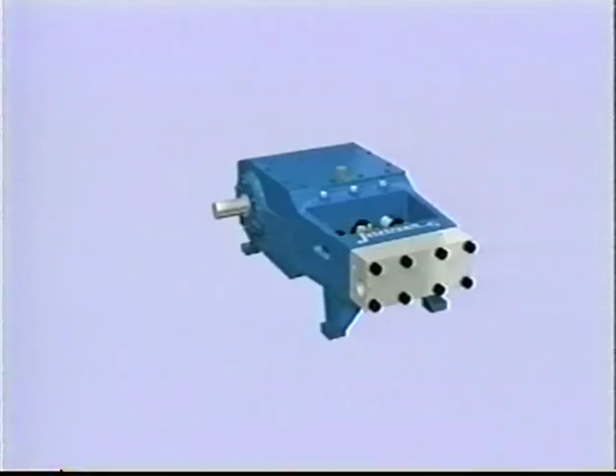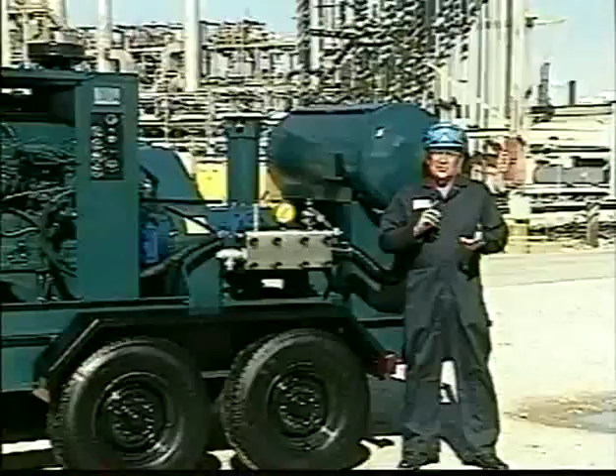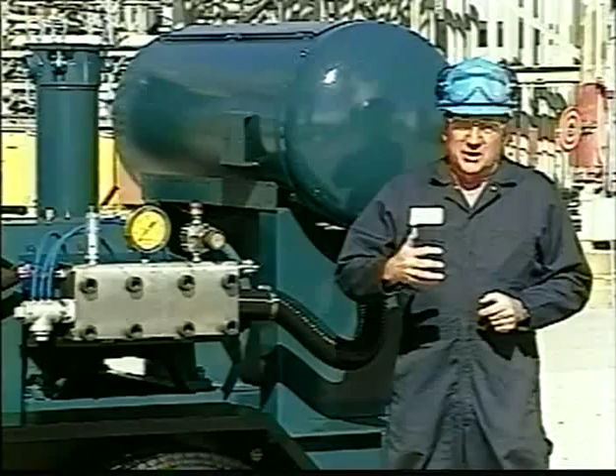There have been notable advancements in industrial water blast systems since water blasting became an important cleaning tool some 30 years ago. Some of these advancements resulted in more efficient water blast accessories to accomplish more cleaning work in shorter times, while other advancements have resulted in more reliable and easier to maintain water blast equipment.

The pump, however, which is the heart and the most important component of a water blast system, has been lagging behind in major advancements. Most water blast pumps sold and operated today utilize 20-year-old pump technology.

I want to show you a new generation pump, JetStream's UNX, whose advanced design will lower your water blast system's operating cost and increase your system's operating range and effectiveness.

To appreciate the benefits of UNX, we'll first look at the inner workings of a common water blast pump, and then examine the problems with these older generation water blast pumps that are still on the market today.

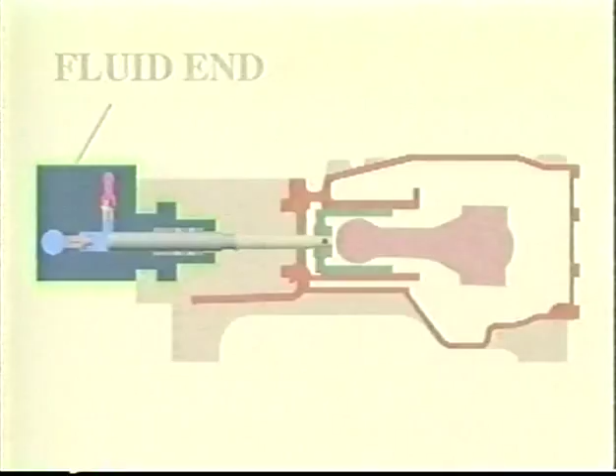A water blast pump consists of a power end and a fluid end. The power end of the pump converts rotary motion into back and forth motion to drive the fluid end. The fluid end produces the high-pressure water.

As the fluid end's plunger moves back, its suction valve opens and water is pulled into the plunger chamber at low pressure. As the plunger moves forward, the suction valve closes and the discharge valve opens. The packing bears down to form a seal against the forward-moving plunger as high-pressure water is forced out of the chamber. The fluid end is subjected to severe operating conditions as the high-pressure water is being produced.

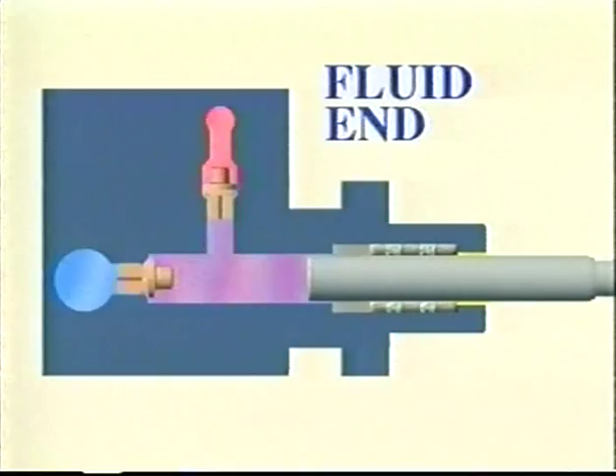High-pressure pulses are created on every plunger stroke. These pulses spike, causing the valves to hammer on their seats and the packing to bear on its moving plunger at pressures actually higher than the pump's pressure gauge reading.

Depending on the pump's speed, these severe conditions occur up to 8 times per second from each plunger. The fluid end's plunger packing must also endure literally miles of plunger travel through it.

Because of these severe conditions, the fluid end is where most of the pump problems occur.

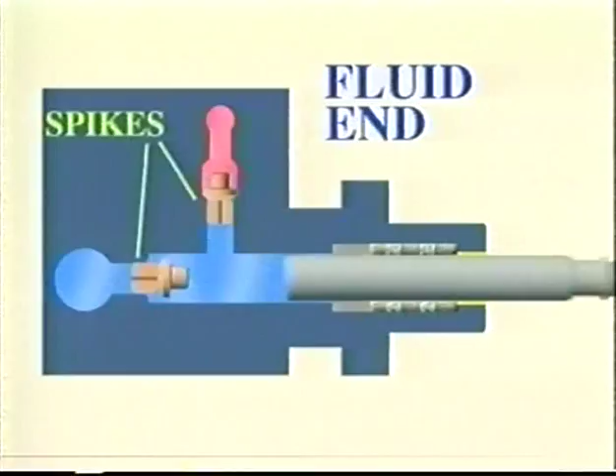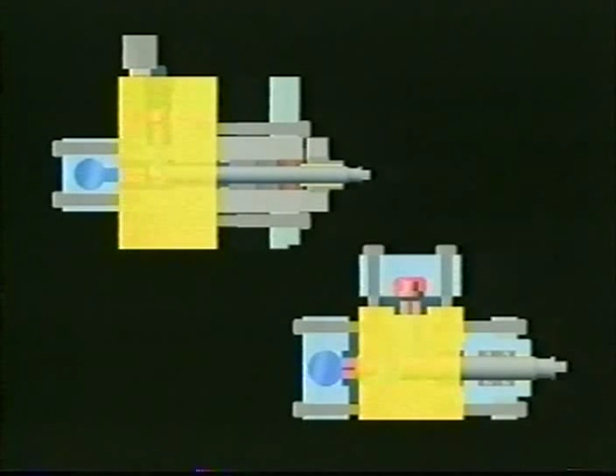Let's take a closer look at some problem areas of these common pumps on the market that still use 20-year-old pump design technology. Both of these fluid ends have a large central block or fluid cylinder that is highly prone to fatigue failure damage caused by the same pressure spikes we saw earlier.

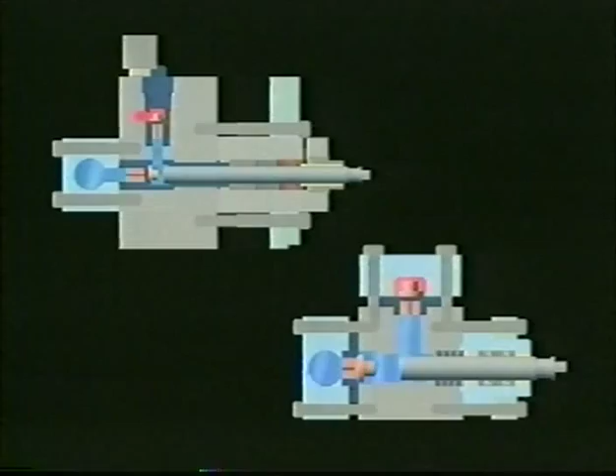Both have separate suction and discharge valves that are positioned either within or on the outside of the fluid cylinder. Leakage around these valves can cause severe erosion damage to the fluid cylinder.

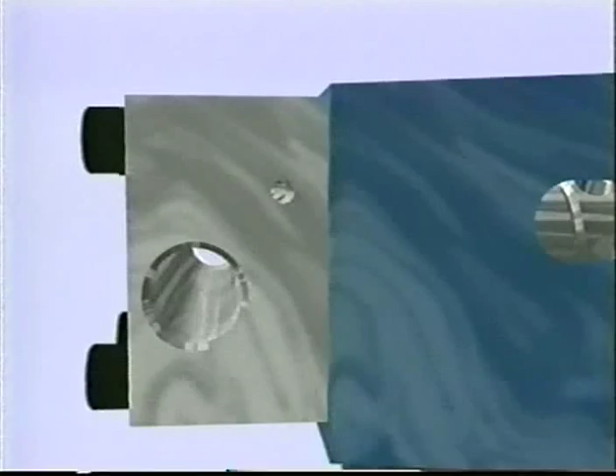Now let's take a look at the UNX water blast pump. At first glance, you'll notice the simplistic design of the UNX. Looking inside the fluid end, you can really appreciate its simplicity. Developing this simple design was the first step JetStream took to provide a more rugged and trouble-free water blast pump.

UNX is the only pump on the market that does not have a fluid cylinder. You see, fluid cylinders, like those found on other pumps, crack and have fatigue failures due to the damaging pressure pulses that we saw earlier.

Instead of a fluid cylinder, the UNX uses a simple manifold to conduct low-pressure suction and high-pressure discharge water to and from its valves. This manifold cannot fail like a fluid cylinder because it's not exposed to the plunger's pressure pulses. With the UNX, the high cost and inconvenience of replacing the fluid cylinder does not exist.

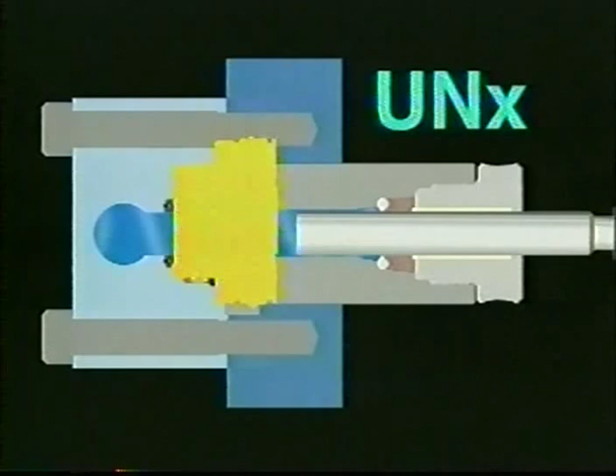Still, another dependability feature is the UNX's inline valves. They allow the fluid end to work smoother and with lower pressure pulses. The result is increased valve life, increased packing life, and increased pump reliability.

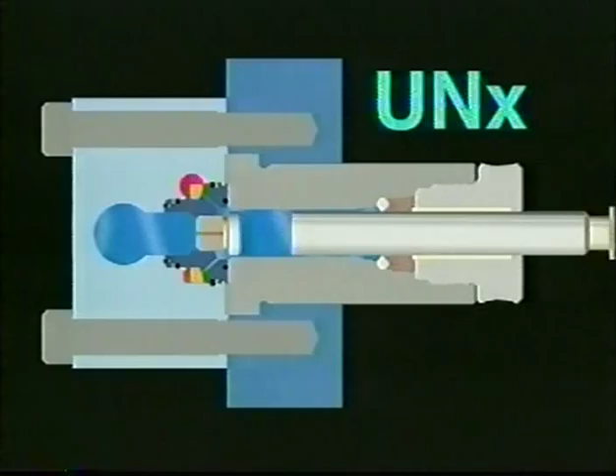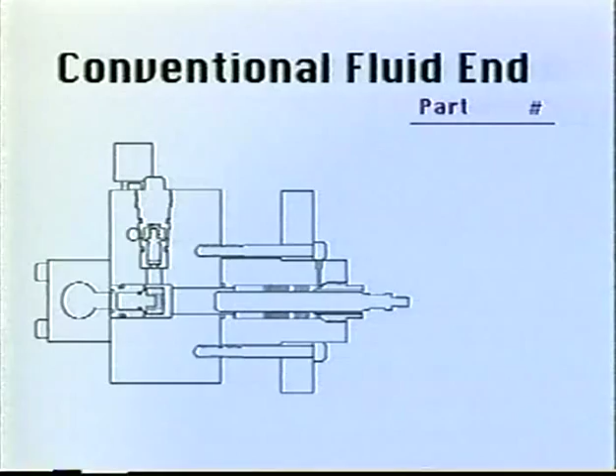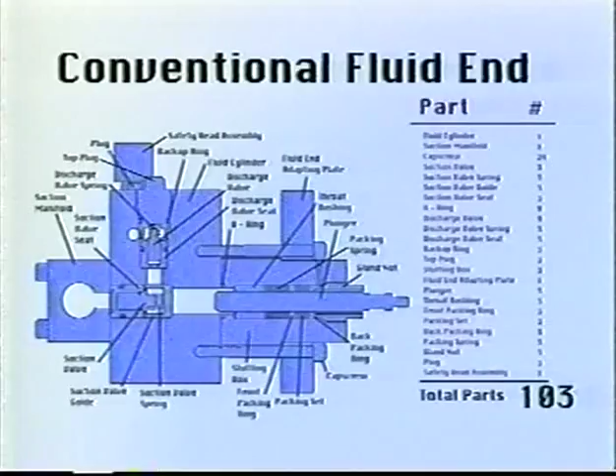The UNX, on the other hand, contains only 37 total parts. The UNX has a number of operator-friendly safeguard features that will save operating time and money.

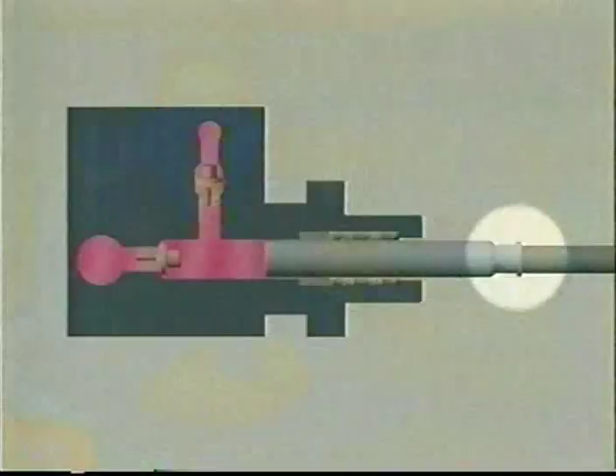For example, where other pumps use threaded-style plungers that can unscrew during operation and crash into the suction valve, the UNX uses clamp-style plungers to prevent this from ever happening. Clamp-style plungers maintain a safe connection to the pony rod at all times.

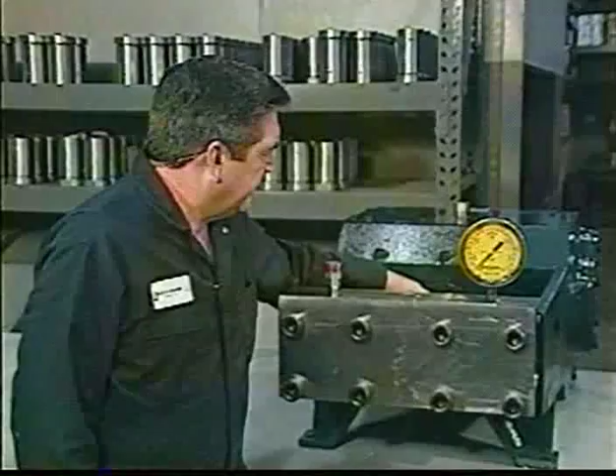Another operator-friendly safeguard feature is that the UNX fluid end uses its discharge pressure to automatically clamp itself together. This reduces the number of cap screws required to hold the fluid end together, from the usual 24 or 36 cap screws to only 8 cap screws on the UNX. Fewer cap screws also means less cap screw tightening hassles or leakage problems for the operator. These are just a few of the features that help make the UNX truly an operator's favorite.

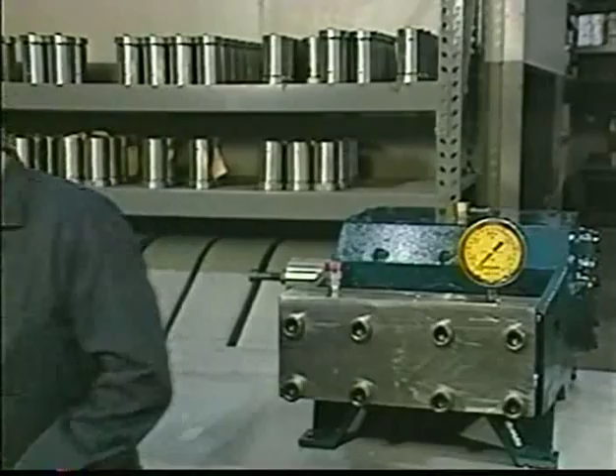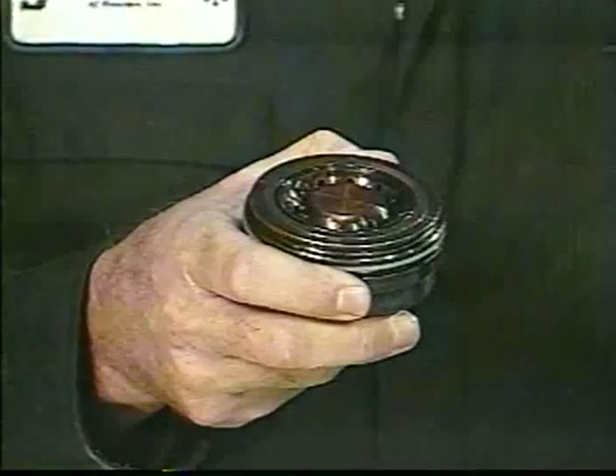The UNX is the easiest pump to maintain on the market. Slip-fit components, coupled with cartridge-style repair parts, make the UNX simple and easy to maintain. For example, the UNX's suction and discharge valves, valve seats, springs, and all of the valve seals are uniquely combined into a single cartridge called a univalve.

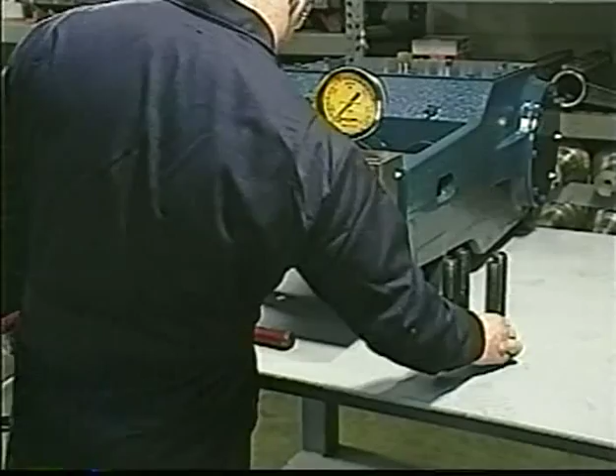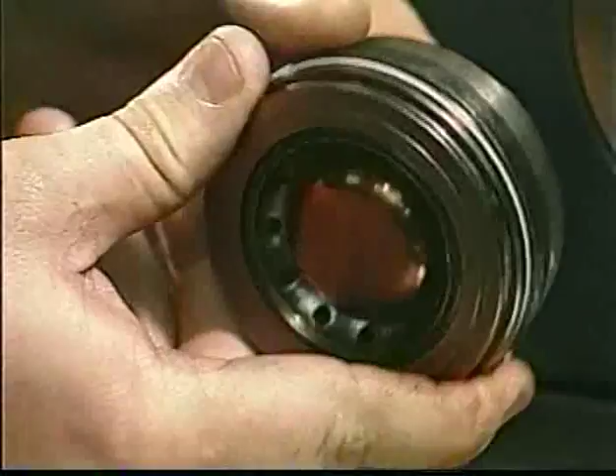Access to the univalve cartridges is easy. First, remove the manifold cap screws. The manifold will now swing down about its bottom hinge. The univalves can now be popped out of their pockets using 2 standard screwdrivers. With this easy access system, the univalves can be inspected, repaired, or replaced in minutes.

Removing the valves on other pumps isn't as easy as a UNX. Let's take a look at 2 popular styles of pumps and compare them to the simplicity of the UNX.

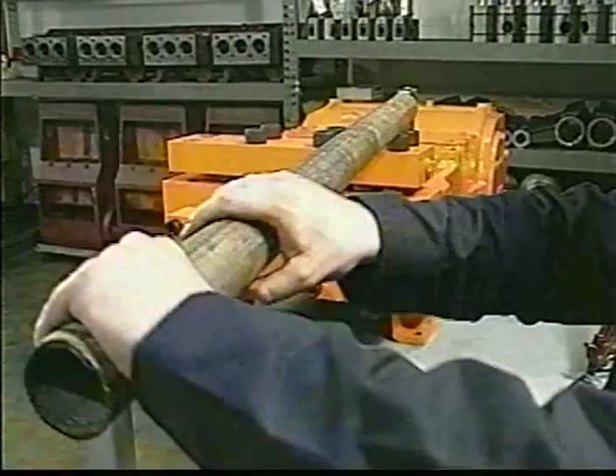This pump incorporates a large central block or fluid cylinder and 2 separate manifolds, one suction manifold and one discharge manifold. To remove the valves on this pump, you first have to remove 8 cap screws from the discharge manifold. This may prove a bit difficult, as this style pump requires discharge cap screw torques of at least 600 foot-pounds.

Remember, the UNX uses its discharge pressure to help clamp the manifold to the power end. Its discharge pressure actually works for it, not against it. This means you'll never have to worry about excessive cap screw torquing.

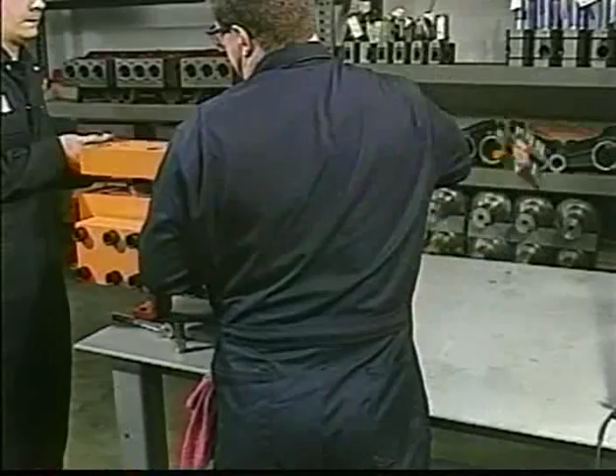After the 8 cap screws are removed, it's time to remove the discharge manifold. This will require a lifting device or the help of a second man to lift the discharge manifold off of the fluid cylinder. With all that said and done, it's finally time to remove the discharge valves. Unfortunately, you're only halfway through the operation.

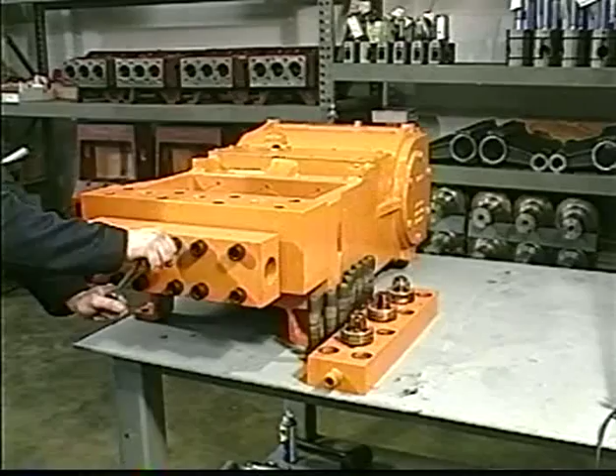We've successfully removed the discharge valves. It's now time to remove the suction valves. This procedure is essentially the same as removing the discharge valves. Remove the 12 suction manifold cap screws. Remove the suction manifold.

Be sure you're wearing protective footwear, such as steel-toed boots, as the suction valves will sometimes fall when you pull the suction manifold away from the fluid cylinder. Now you're finally done. Getting to the valves, that is. Remember, once you've replaced the valves, this all has to go back on.

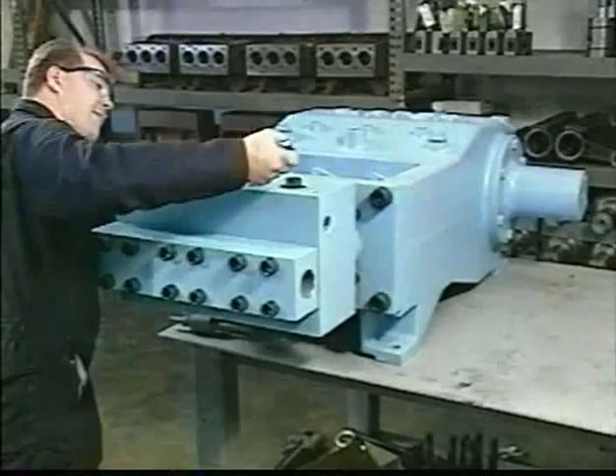This style pump incorporates a suction manifold and a massive fluid cylinder. To remove the valves on this pump, first remove the 3 top plugs. This will allow you access to the discharge valves.

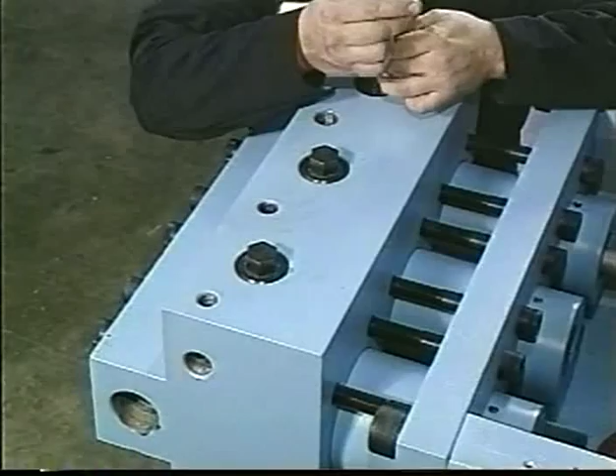Use a set of long pliers to reach in and remove the valve spring, and then the valve. To remove the valve seat, you have to use a specialized or proprietary removal tool. Screw this tool into the valve seat and use a hammering action until it finally breaks loose. This procedure has to be repeated for each of the remaining 2 discharge valve assemblies.

To remove the suction valves, you have to first remove the 12 cap screws that hold the suction manifold on the fluid cylinder. Then remove the suction manifold.

Once removed, the special valve seat removal tool should be used to hammer the seat until it breaks loose. Remove the valve and then the spring. Follow this by using long pliers to remove the valve guide.

To a specialized mechanic, these common maintenance operations may not seem like much work, but when pitted against the maintenance simplicity of the UNX, they pale in comparison. Remember, to remove the valves on the UNX, all you have to do is remove 8 cap screws, swing the manifold down on its hinge, and pop the cartridges out with a standard pair of screwdrivers. One of the biggest pluses to the UNX's simplistic design is the fact that periodic maintenance checks are a reality without the cost of downtime or specialized manpower.

The UNX valves can be checked in the field by one operator with no special tools in a matter of minutes. All other pump designs are so time-consuming and difficult that periodic maintenance checks are not practical. They require special mechanics, too many specialized tools, too much time to work on, and usually require the use of a crane-equipped shop. It's so inconvenient, in fact, that most owners of these pumps never check the valves until something goes wrong on the job.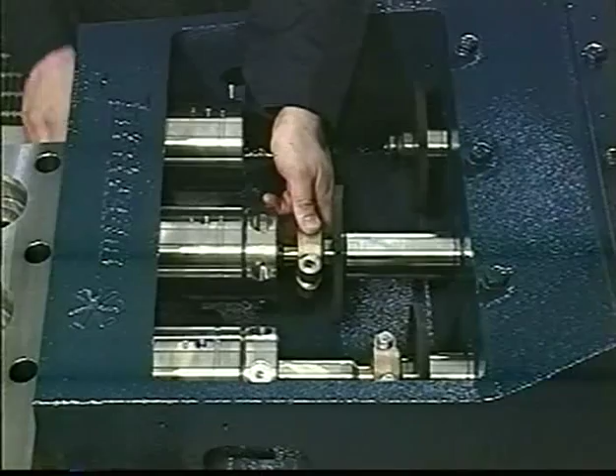Let's take a look. First, remove the plunger clamp. Then all you have to do is unscrew the packing gland. That's it. The packing set, plunger, and gland nut all lift out in one convenient assembly. The UNX's plunger packing set is called Unipack. Unlike other replacement packing sets that contain only the packing rings, JetStream's Unipack set contains all the parts, including the plunger brass, to make the entire packing section of the stuffing box up to new condition.

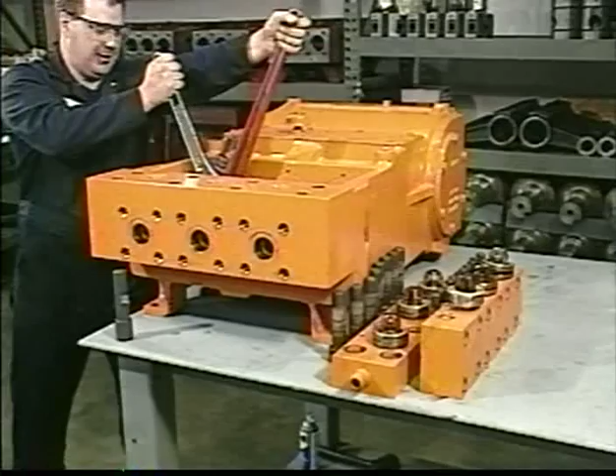Let's compare the simplicity of the UNX first with this style pump. Using 2 wrenches and a considerable amount of torque, unscrew the plunger from the crosshead stub. Now, push the plunger into the stuffing box. Remove the 4 stuffing box flange bolts. This may prove a bit tricky, as the bolt's location and confined area makes them hard to get to. Now, pry on the stuffing box until it breaks loose from the fluid cylinder. Once this is complete, you can remove the stuffing box and plunger assembly from the fluid cylinder.

Remove the packing spring from the plunger and push the plunger out of the stuffing box. Now you have to use a special tool to literally hammer the packing out of the stuffing box. You've now gained access to the packing, at least to one set of packing. You must repeat this entire procedure 2 more times to gain access to all 3 packing sets.

The packing changeout procedure is similar in this style of pump. You must first start out as though you're going to replace the valves. Remove the 12 cap screws that hold the suction manifold on, and remove the suction manifold from the face of the fluid cylinder. We've already been through that procedure, so we'll pick up where we left off with the valve change.

At this point, to remove the first set of packing, you have to loosen the gland nut. Then remove the plunger. The plunger on this style pump has to come through the front of the fluid cylinder. Once this is complete, use a rod to push the throat bushing, packing springs, packing set, and rear packing ring from the front to the rear of the fluid end. You now have access to one set of packing. Repeat the entire procedure 2 more times to gain access to all 3 packing sets.

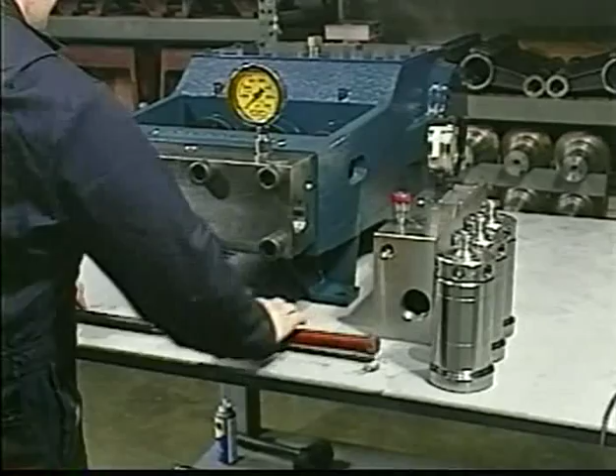JetStream engineers not only designed a fluid end that is simple to use and maintain, but it's also versatile. The UNX can be converted from an 8,000, 10,000, or 15,000 PSI pump to a 20,000 or higher PSI pump in minutes. For a higher pressure UNX, simply disconnect the plunger clamps, change out the stuffing box assemblies, and replace the lower pressure manifold with the higher pressure manifold. That's it. The higher pressure manifold is designed with special internal flow passages for optimal higher pressure performance.

And it uses integral special connections for safer higher pressure operation. Slip-fit modular design and parts light enough to be handled without a crane or forklift give the UNX fast and easy pressure range convertibility. The UNX, therefore, can be two pumps in one: a lower pressure pump for the majority of jobs, and a 20,000 or higher PSI pump for the tough jobs that require the extra pressure.

So, what do all of these UNX features mean to you? All of the UNX features combine to give you lower pump operating costs, fewer operating headaches, and more flexibility in your daily Waterblast operations.

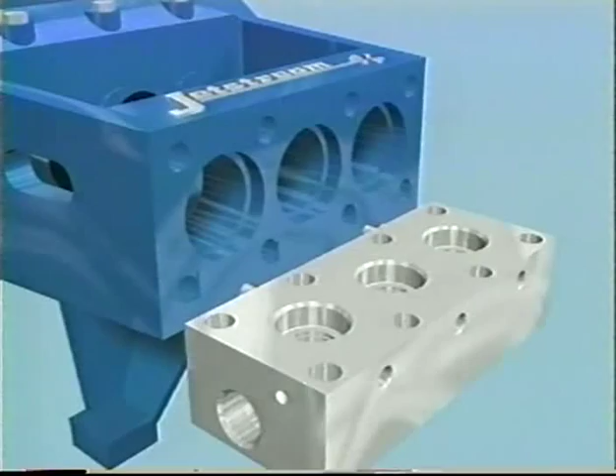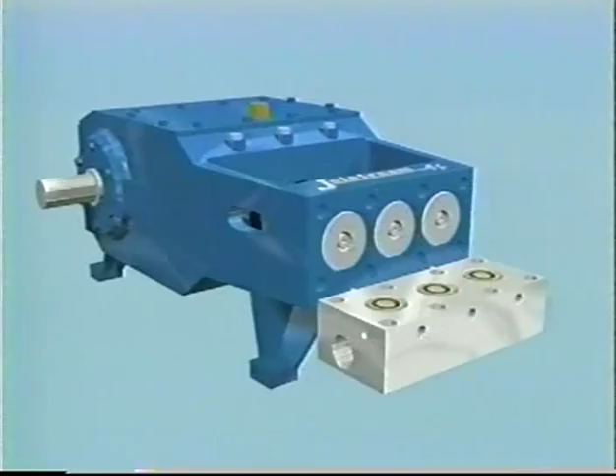Easy access inline valve cartridge design allows fast on-the-job maintenance, eliminating the need for specialized pump mechanics or backup equipment. Add to this fewer parts, easy access packing, and the pressure range conversion features of the UNX, and you can appreciate value that no other Waterblast pump can provide.

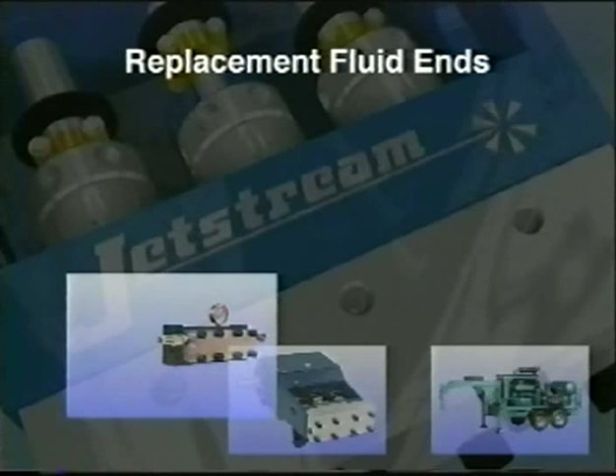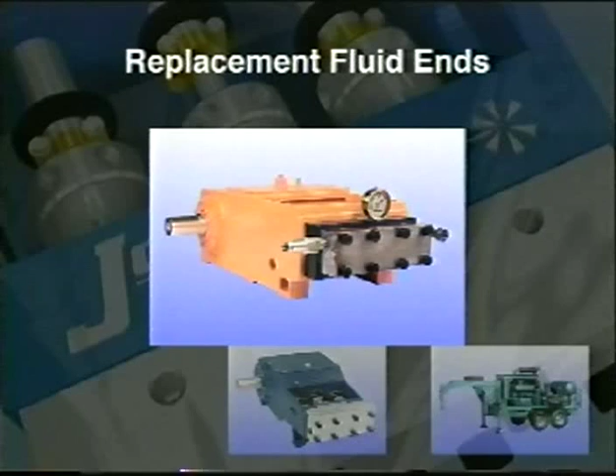UNX fluid ends are available as direct bolt-on replacements for all popular Waterblast pumps. The UNX fluid end also comes standard on all JetStream bare shaft pumps and on all JetStream Waterblast systems. UNX replacement fluid ends are direct bolt-on replacements for original equipment pump fluid ends. They can be used as an economical replacement for a severely damaged fluid end or as a pump upgrade to achieve operating pressures up to 40,000 psi. UNX replacement fluid ends are available for all popular Waterblast pumps and are supplied with all the necessary plumbing and hardware to make them immediately operational.

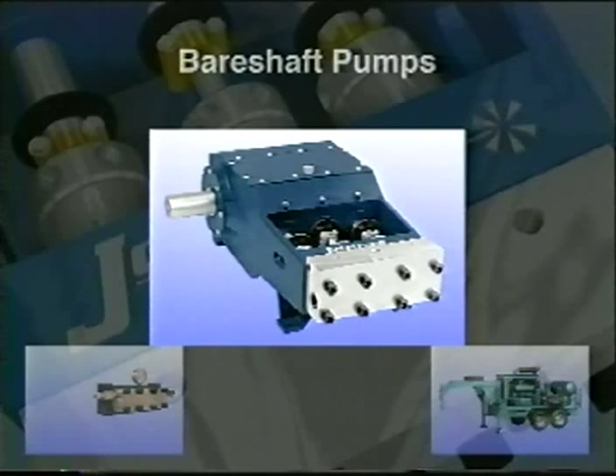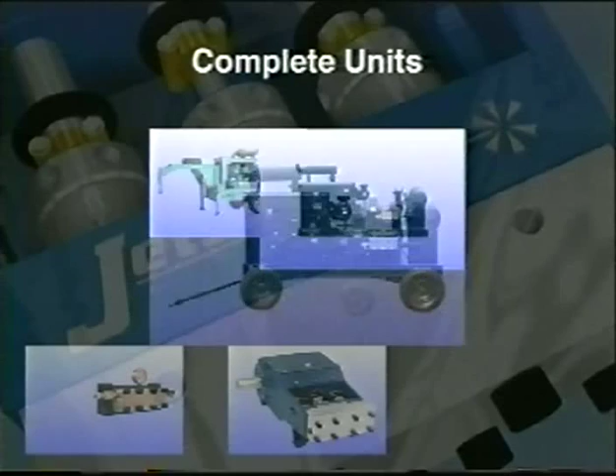UNX bare shaft pumps are available in sizes from 25 to 300 horsepower and can be purchased separately should you ever decide to build your own custom unit. UNX bare shaft pumps use JetStream power ends that are built tough, just like the fluid ends. UNX Waterblast units are available in pressures up to 40,000 psi and sizes from 25 to 300 horsepower. These units are designed and built around the JetStream commitment to reliability, ease of operation, and ease of maintenance.

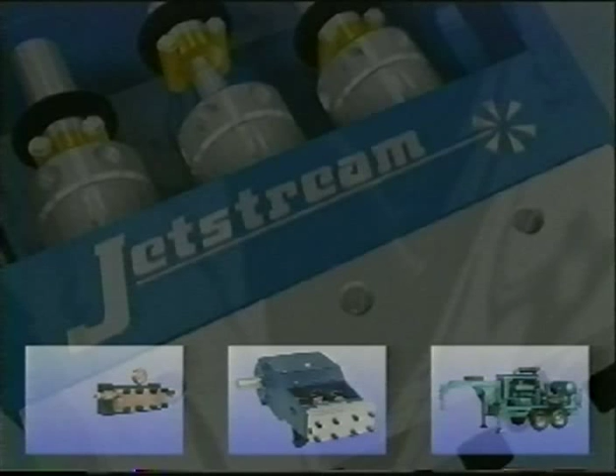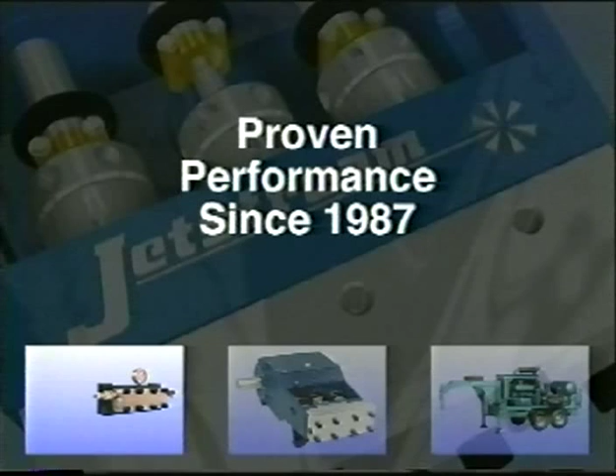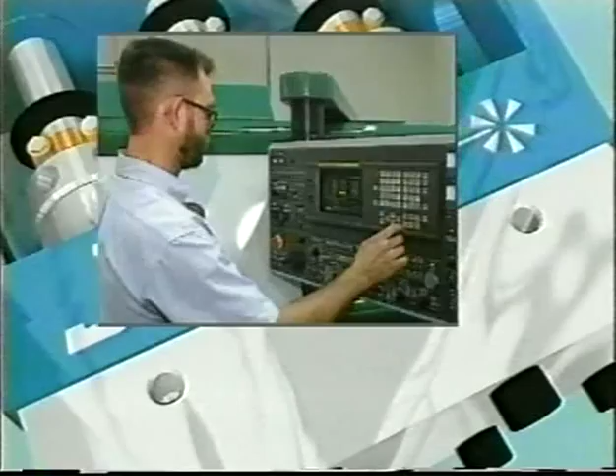The well-proven UNX pump line has been in production since 1987. Since then, hundreds of UNXs, operating both as complete pumps or as replacement and pressure conversion fluid ends, have been put into service with satisfied customers. JetStream has been manufacturing Waterblast equipment for over 20 years. Our manufacturing facility in Houston, Texas operates around the clock to provide our customers with the best products and service available in the Waterblast industry.